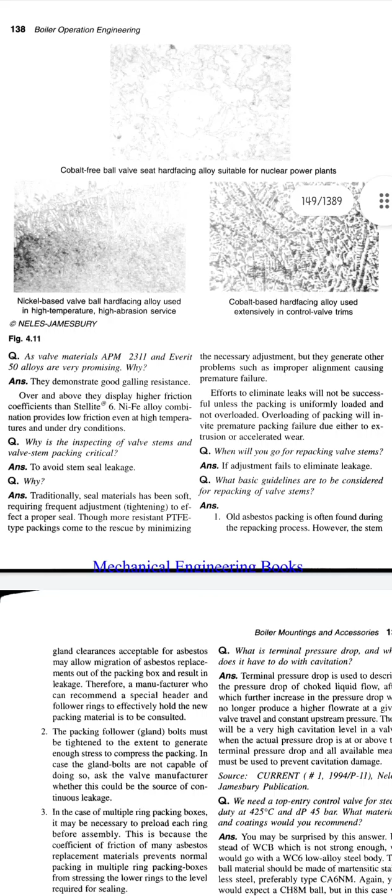Hello gentlemen, this is page number 138.

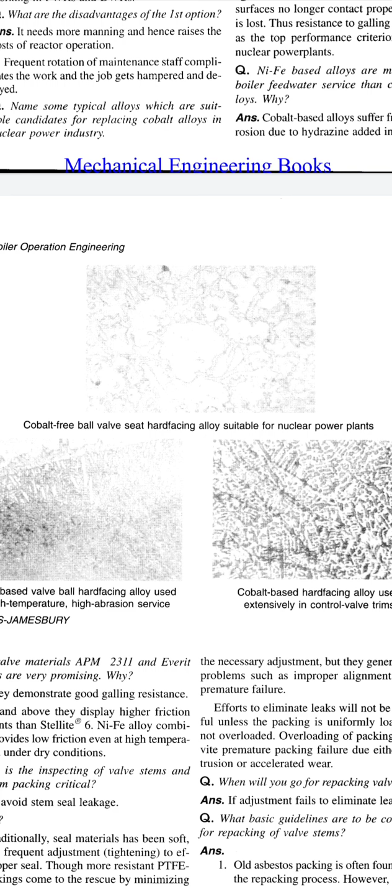In this diagram we can see the valve material microstructure diagram. First, cobalt-free ball valve seat hard facing alloy suitable for nuclear power plants. Second, nickel-based valve ball hard facing alloy used in high temperature, high abrasion services. Third, cobalt-based hard facing alloy used extensively in control valve trims.

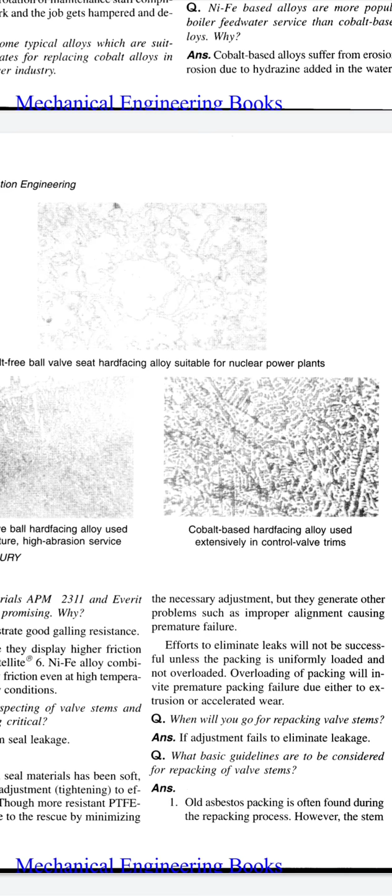First question: as valve materials, APM 2311 and Everit 50 alloys are very promising. Why? Answer: they demonstrate good galling resistance. Over and above, they display higher friction coefficient than Stellite 6. Nickel-iron alloy combination provides low friction even at high temperature and under dry conditions.

Question: what makes inspecting of valve stems and valve stem packing critical? Answer: to avoid stem leak. Why? Traditionally, seal materials have been soft, requiring frequent adjustment and tightening to effect a proper seal.

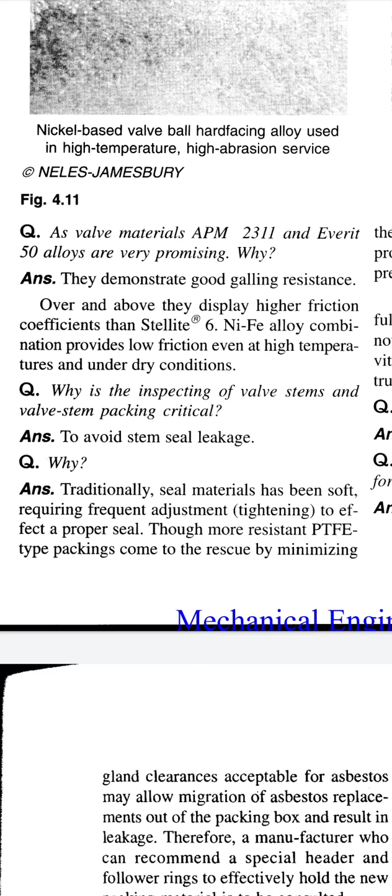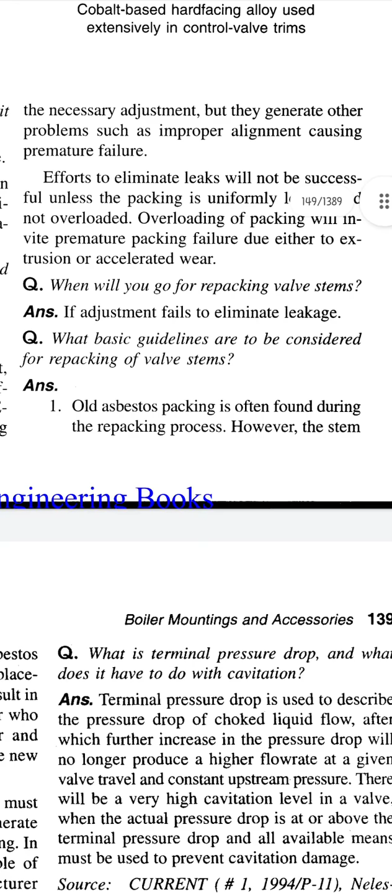Though more resistant PTFE type packing comes to the rescue by minimizing the necessary adjustment, it generates other problems such as improper alignment and premature failure. Efforts to eliminate leaks will not be successful unless the packing is uniformly loaded and not overloaded. Overloading of packing will invite premature packing failure due to either extrusion or accelerated wear.

Question: when will you go for repacking valve stems? Answer: if adjustment fails to eliminate leakages.

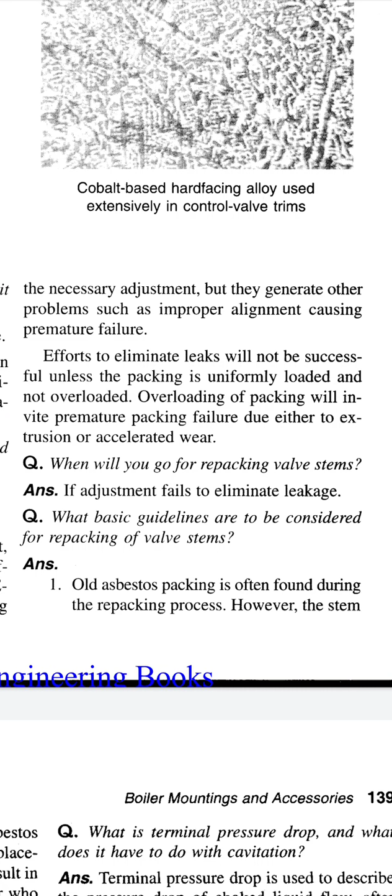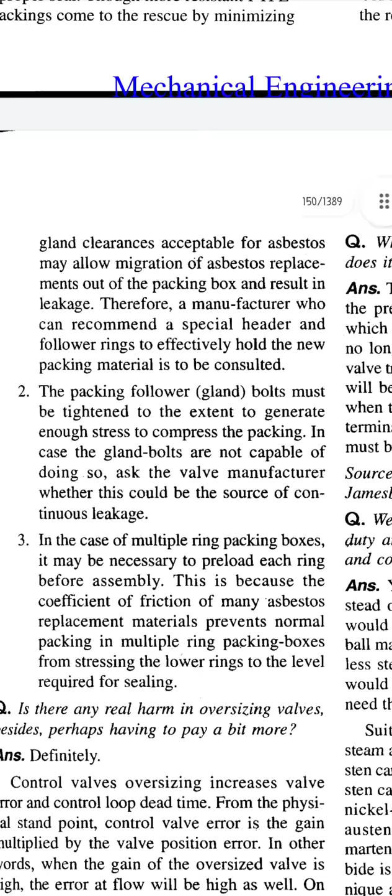Question: what basic guidelines are to be considered for repacking of valve stem? Answer: old asbestos packing is often found during the repacking process. However, the stem gland clearance acceptable for asbestos may allow migration of asbestos replacement out of the packing box and result in leakage. Therefore, a manufacturer who can recommend a special header and follower rings to effectively hold the new packing material is to be consulted.

Second, the packing follower gland bolts must be tightened to the extent needed to generate enough stress to compress the packing. In case the gland bolts are not capable of doing so, ask the valve manufacturer whether this could be the source of continuous leakage.

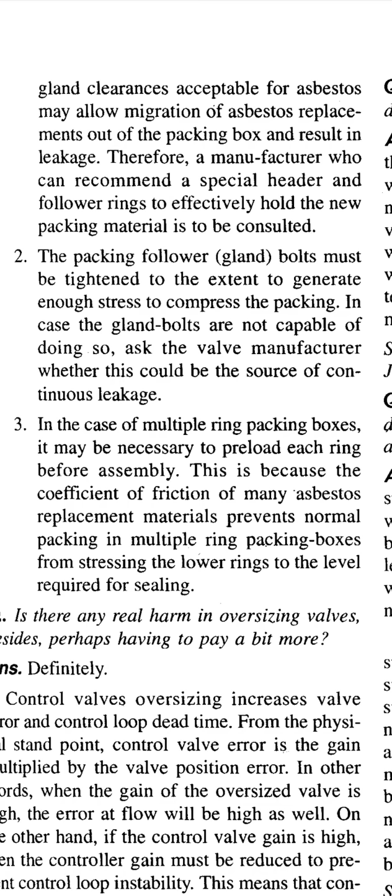Third, in the case of multiple ring packing boxes, it may be necessary to preload each ring before assembly. This is because the coefficient of friction of many asbestos replacement materials prevents normal packing in multiple ring packing boxes from stressing the lower rings to the level required for sealing.

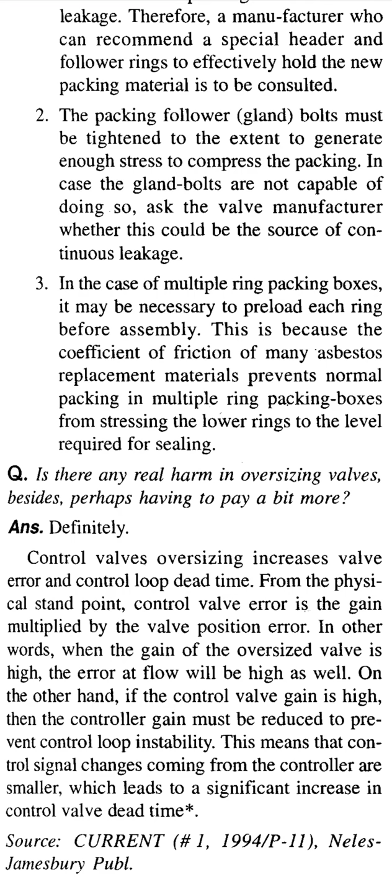Question: is there any real harm in oversizing valves besides perhaps having to pay a bit more? Definitely. Control valve oversizing increases valve error and control loop dead time. From the physical standpoint, control valve error is the gain multiplied by the valve position error. In other words, when the gain of an oversized valve is high, the error at flow will be high as well.

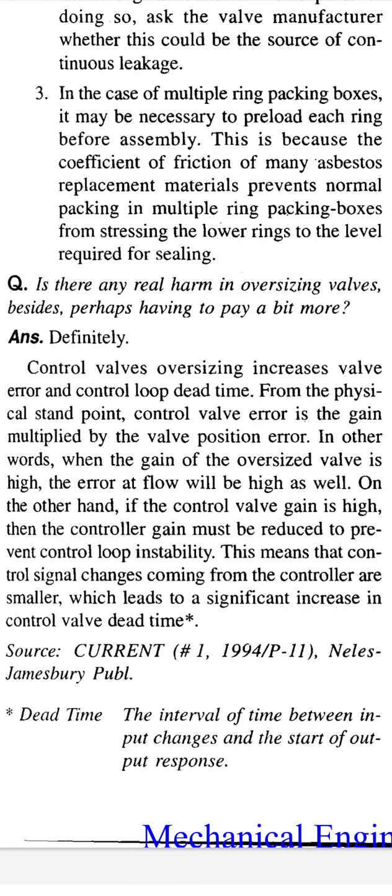On the other hand, if the control valve gain is high, then the controller gain must be reduced to prevent control loop instability. This means that control signal changes coming from the controller are smaller, which leads to a significant increase in control valve dead time. Dead time is the interval of time between input changes and the start of output response.

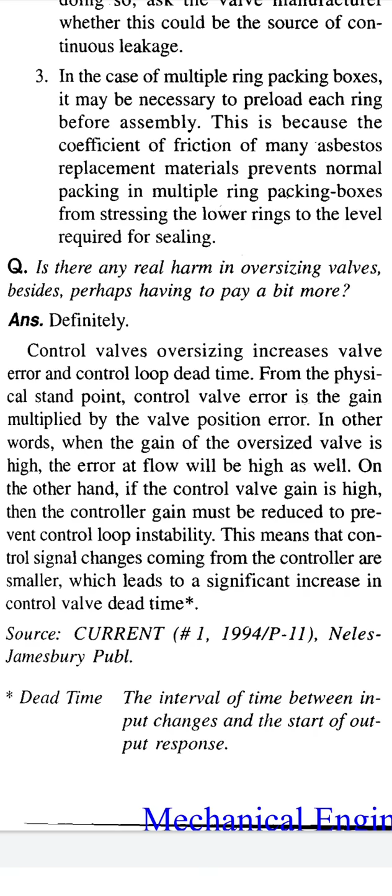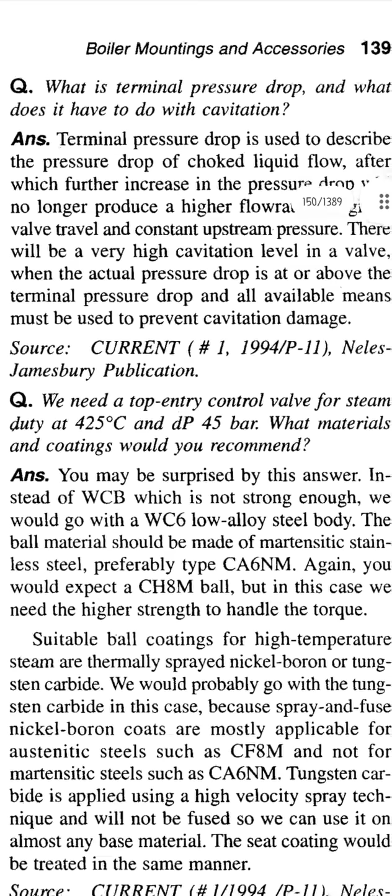Question: what is terminal pressure drop and what does it have to do with cavitation? Answer: terminal pressure drop is used to describe the pressure drop of choked liquid flow, after which further increase in the pressure drop will no longer produce a higher flow rate at a given valve travel and constant upstream pressure.

There will be a high cavitation level in a valve when the actual pressure drop is at or above the terminal pressure drop, and all available means must be used to prevent cavitation damage.

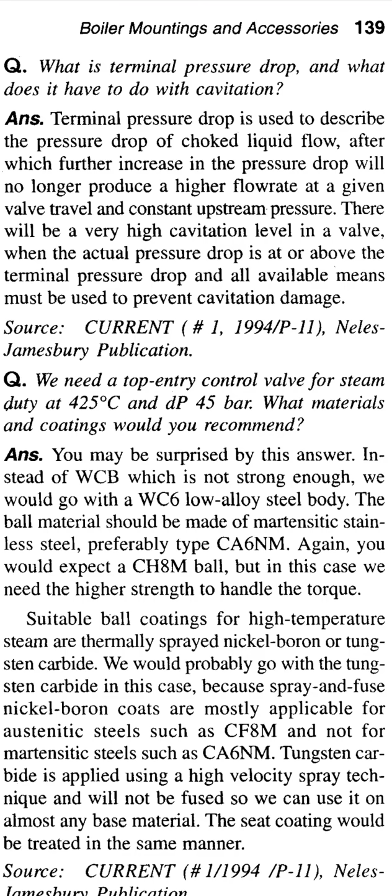We need a top entry control valve for steam duty at 425 degrees Celsius and DP 45 bar. What materials and coating would you recommend?

You may be surprised by this answer. Instead of WCB, which is not strong enough, we would go with a WC6 low alloy steel body.

The ball material should be made of martensitic stainless steel, preferably type CA6NM. Again, you would expect a CH8M ball, but in this case we need higher strength to handle the torque.

Suitable ball coating for high temperature steam is either thermally sprayed nickel boron or tungsten carbide. We would probably go with tungsten carbide in this case because sprayed and fused nickel boron coats are mostly applicable for austenitic steels such as CF8M and not for martensitic steels such as CA6NM. Tungsten carbide is applied using a high velocity spray technique and is not fused, so we can use it on almost any base material. The seat coating would be treated in the same manner.

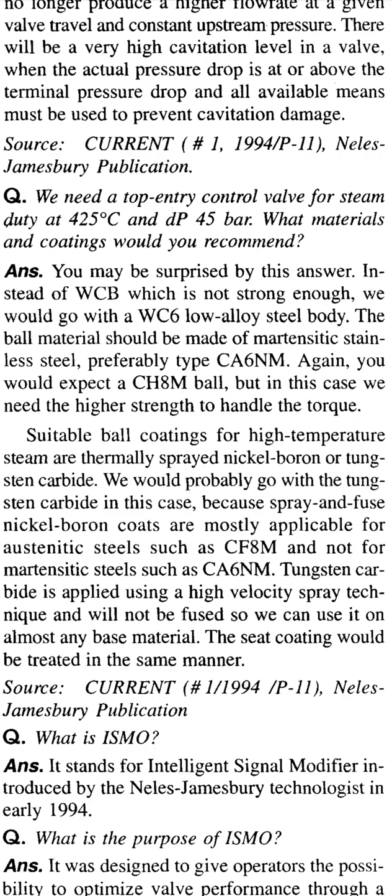What is ISMO? It stands for Intelligent Signal Modifier, introduced by the Neles-Jamesbury technologist in early 1994.

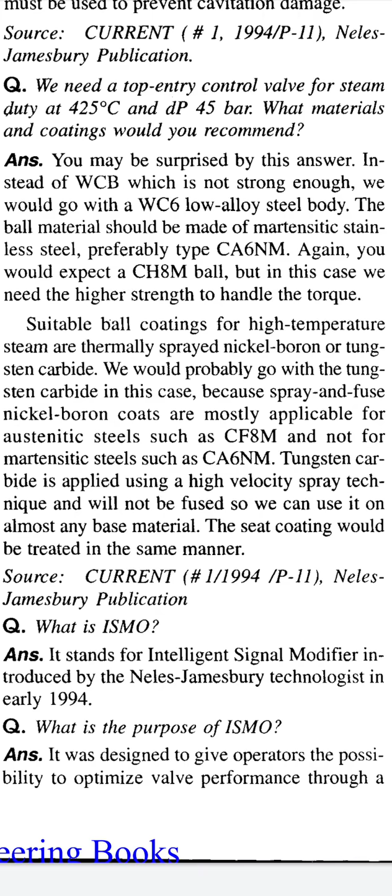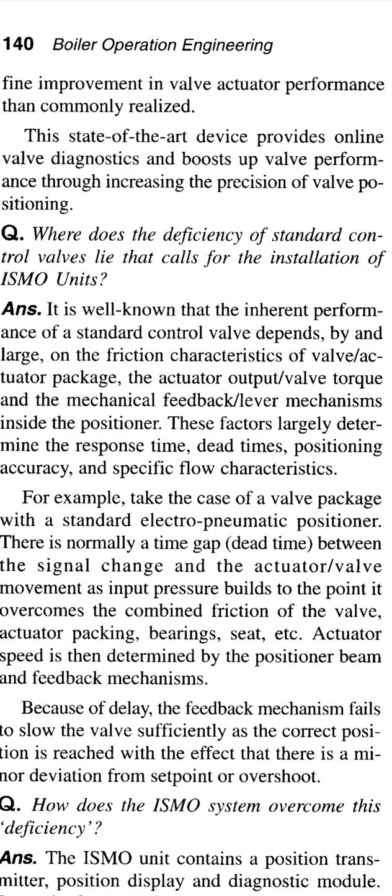What is the purpose of ISMO? It was designed to give operators the possibility to optimize valve performance through a finer improvement in valve actuator performance than commonly realized. This state of the art device provides online valve diagnostics and boosts valve performance by increasing the precision of valve positioning.

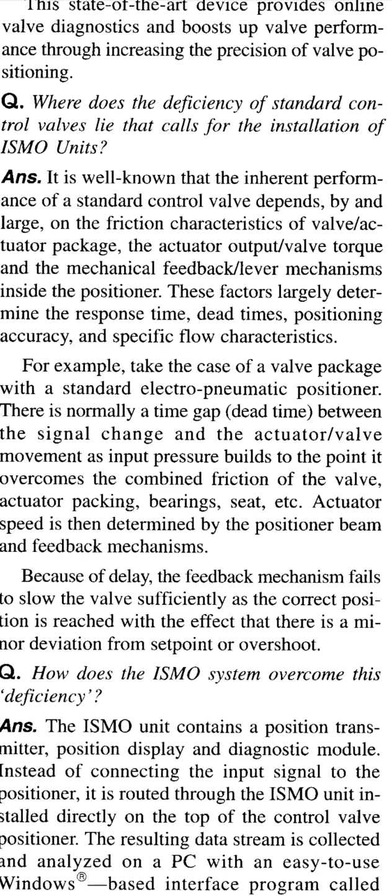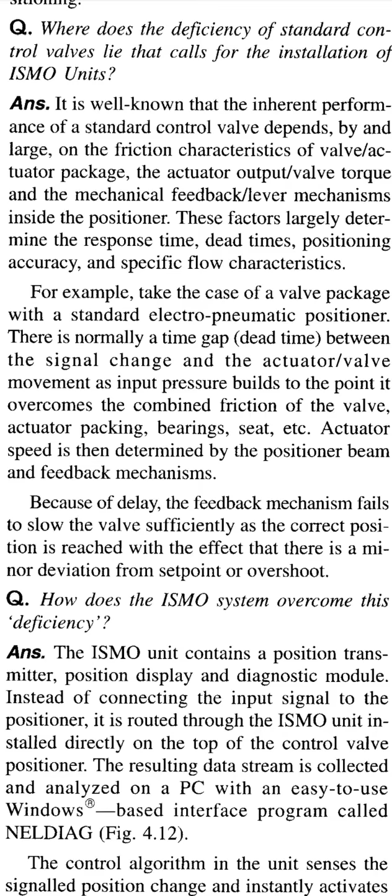Where does the deficiency of standard control valves lie that calls for the installation of ISMO units? It is well known that the inherent performance of a standard control valve depends largely on the friction characteristic of the valve actuator package, the actuator output valve torque, and the mechanical feedback lever mechanisms inside the positioner. These factors largely determine the response time, dead times, positioning accuracy, and specific flow characteristics.

For example, take the case of a valve package with a standard electro-pneumatic positioner. There is normally a time gap, a dead time, between the signal change and the actuator valve movement, as input pressure builds to the point where it overcomes the combined friction of the valve, actuator packing, bearing, seat, etc.

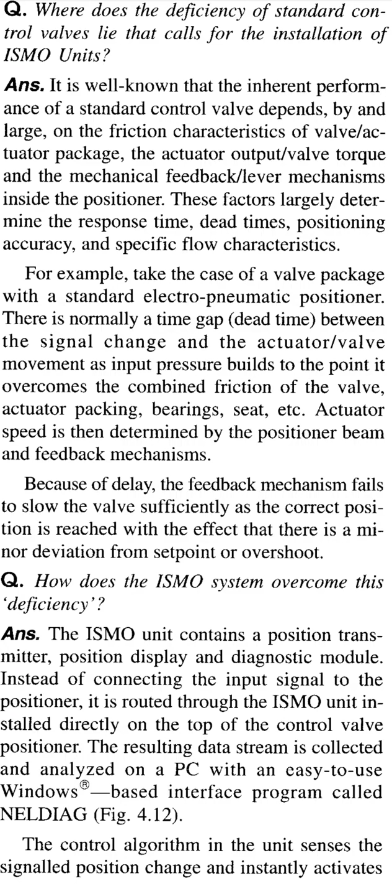Actuator speed is then determined by the positioner, beam, and feedback mechanisms. Because of the delay, the feedback mechanism fails to slow the valve sufficiently as the correct position is reached, with the effect that there is a minor deviation from set point or overshoot.

How does the ISMO system overcome this deficiency? The ISMO unit contains a position transmitter, position display, and diagnostic module. Instead of connecting the input signal to the positioner, it is routed through the ISMO unit installed directly on top of the control positioner.

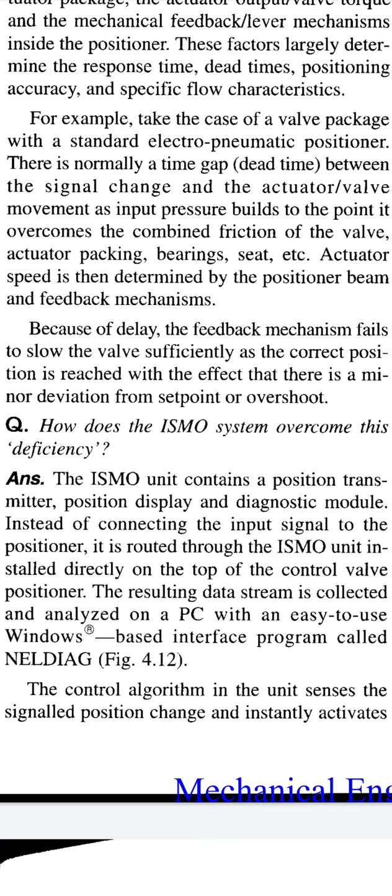The resulting data stream is collected and analyzed on a PC with an easy to use Windows based interface program called NELDIAG. The control algorithm in the unit senses the signaled position change and instantly activates the actuator to start moving. Valve position change is therefore synchronous with signal change, and the set point is reached without the slightest overshoot.

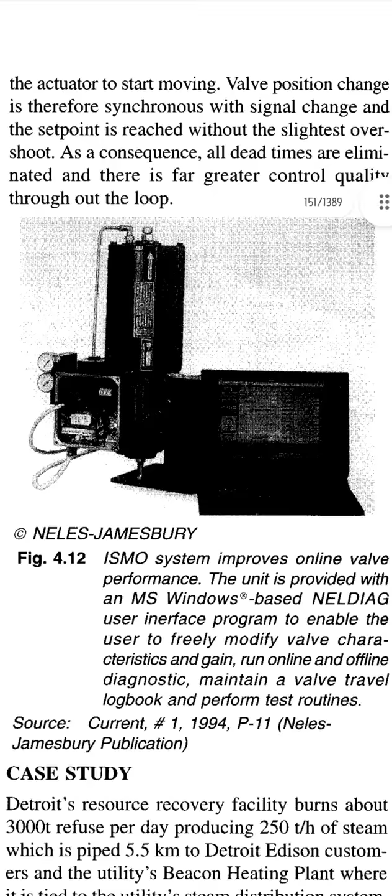As a consequence, all dead times are eliminated and there is far greater control quality throughout the loop. This is how the Neles-Jamesbury ISMO system improves online valve performance.

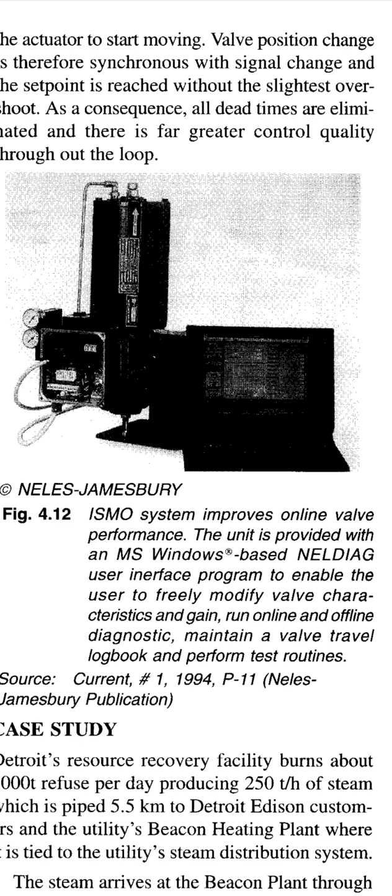The unit is provided with an MS Windows based NELDIAG user interface program to enable the user to freely modify valve characteristics, run online and offline diagnostics, maintain a valve travel logbook, and perform test routines.

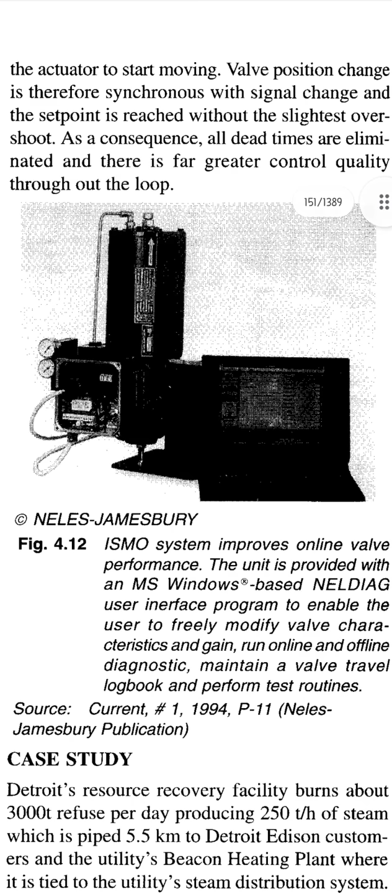So we will see the case study in the next video. Thank you.